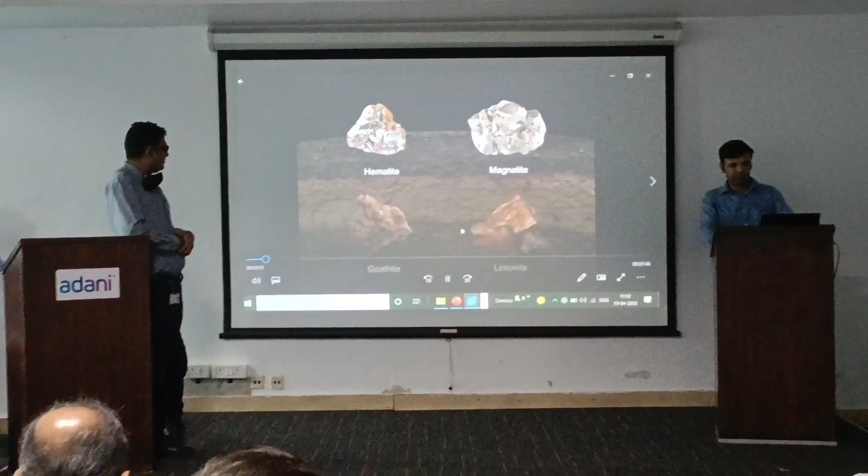That is the fact. But before we start, this is a very good platform wherein we can share knowledge. What actually is a steel industry all about? How do we make steel? So for steel we need to make iron. So with iron we can start. What we have is basically the ores, different types of iron ores, which go into making the iron in the smelting process.

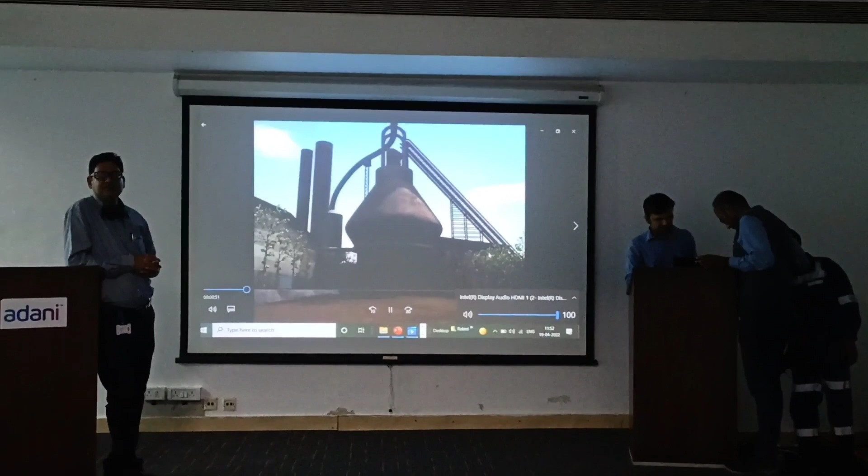Blast furnace is actually the heart of any steel industry or an iron making industry, basically because blast furnace is the furnace in which the smelting process takes place. This is a typical visual of a blast furnace, which will be a sort of belly shaped vessel. Almost the diameter 10 to 25 meters, the height being 30 to 45 meters. The hearth is the place, जो जैसे hearth मतलब गर्म, where the actual smelting or the process of reduction of the ore into iron takes place.

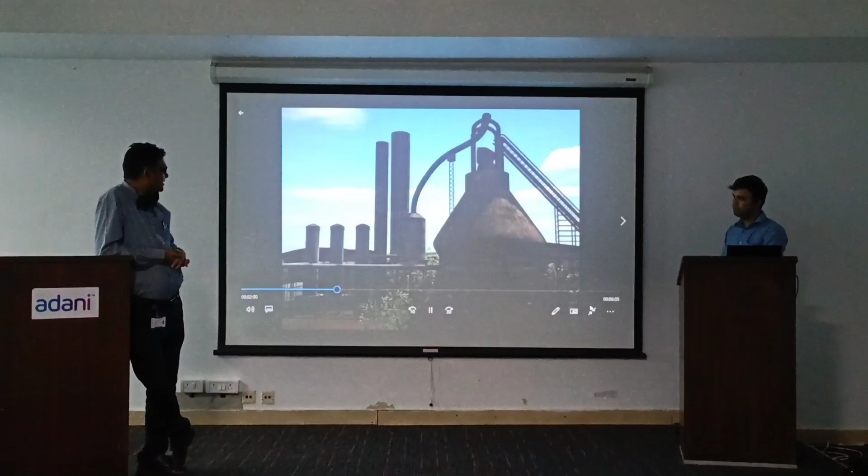From top the charge is put in, wherein the charge will be a mixture of coke, iron ore, limestone, dolomite. Molten metal and slag come from the bottom. Basically, जो hearth है जहाँ पर process होता है. The dust catcher is, of course, where the off gases come in and the dust is collected. The stoves give the hot air blast through the tuyeres.

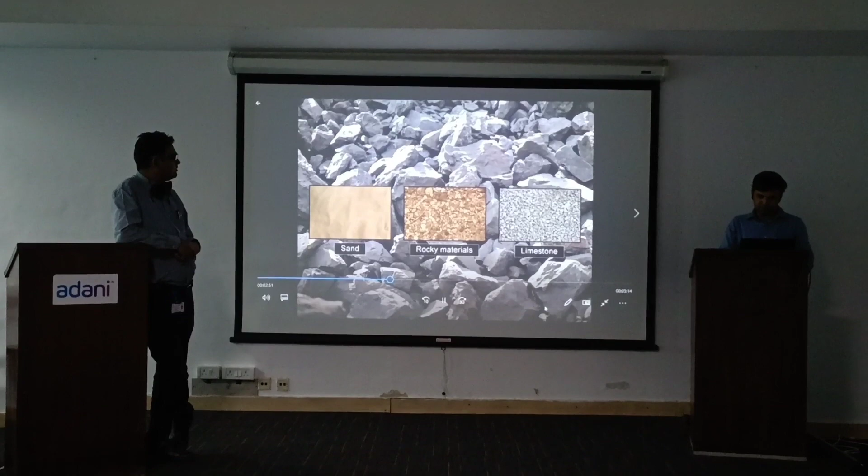This is actually जो impurities होते हैं, where you add limestone dolomite for the agglomeration of all the impurities. जैसे दूध में आप ऊपर जो ये देखते हैं मलाई जमती है, इसी तरह slag जो है, it gets collected with all the impurities, and the molten metal then comes in its pure form.

So the hot air blast helps in heating the mixture as well as calcination, which ultimately helps in the smelting process of the iron. Coke is added, which functions as a fuel, as well as the carbon of the coke helps in the reduction reaction through formation of CO. That CO will help in the reduction of the iron oxide.

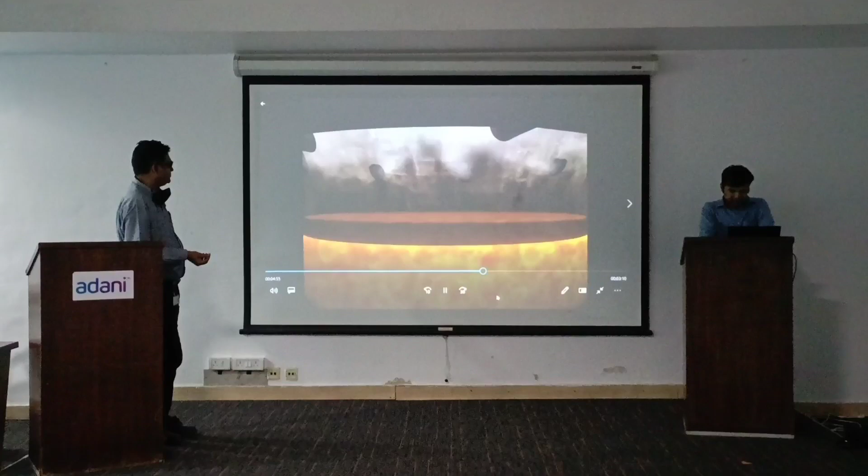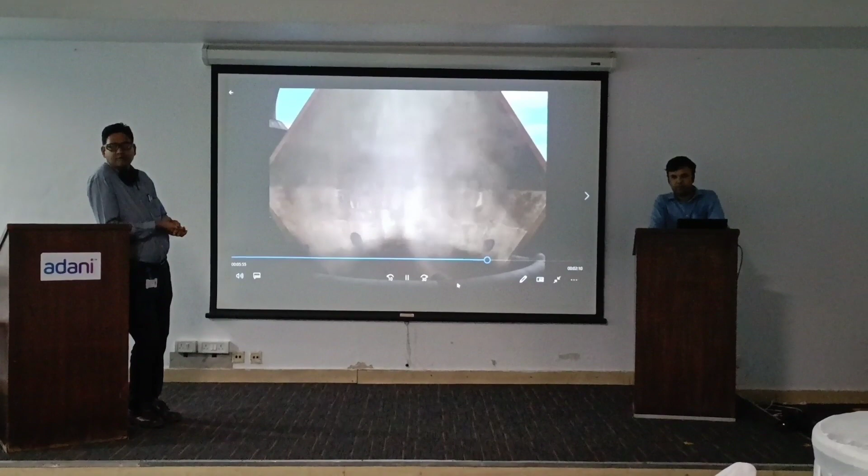This is where the combustion takes place in the hearth of the blast furnace. And the temperature ranges, as I said, 300 to 2000. The CO2 combining with the carbon from the coke forms carbon monoxide. And this is what the slag is all about, where the calcium oxide from the limestone gets combined with the silica part or the impurities of the ore, forming slag.

Now the reduction reaction will take place, where the Fe2O3 combines with carbon monoxide to form liquid molten metal, that is liquid iron, which is also called pig iron. And this molten metal, being heavier, will collect in the hearth at the bottom of the furnace, which is again tapped. This is how the tapping and the liquid metal comes in. There will be a separator which will separate the slag, which is not desirable to us, and the liquid metal.

The liquid metal is taken for further processing into finished products like, as I said, the ductile iron pipe, or it can be used in steel making plants to make different grades of steel and further processed into casters or pipes, plates, and coils.

Unfortunately, we did not have the audio. We had further videos also.

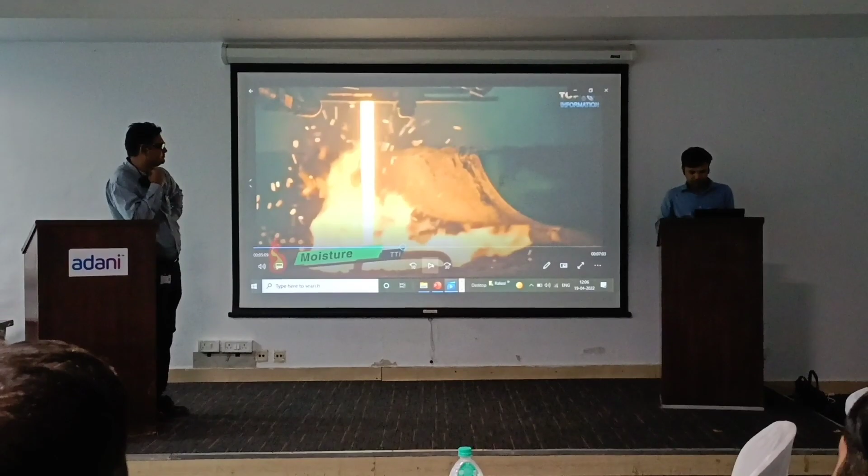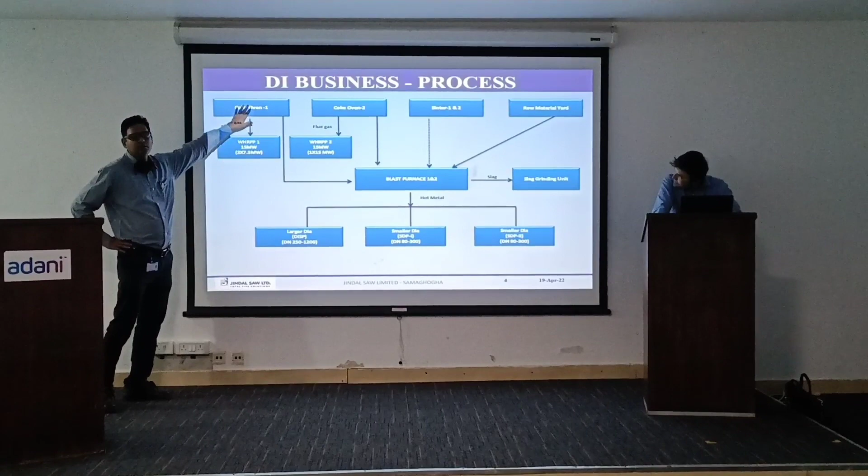So basically, if we talk about the business in a flow perspective, this is how actually these DI pipes are made. This is the finished product, large diameter. Start from coke oven, where I said coking. Coking is a process of making coke from coal. There are specific qualities of coal which are called coking coal. From there, this coke is used for blast furnace.

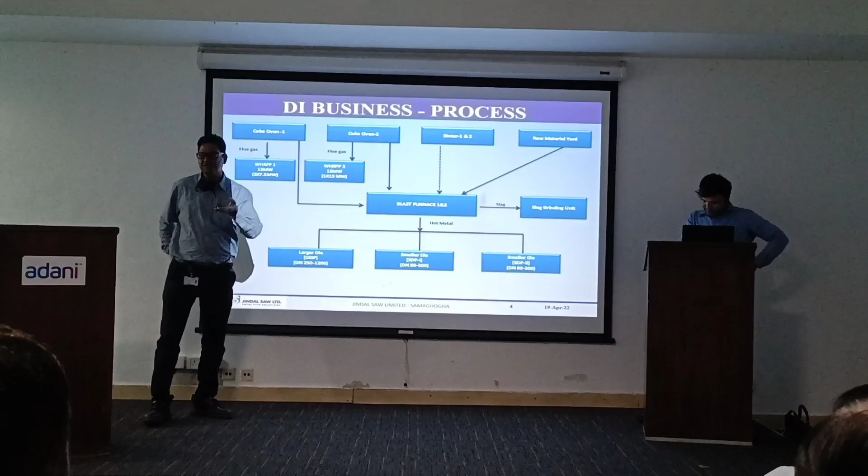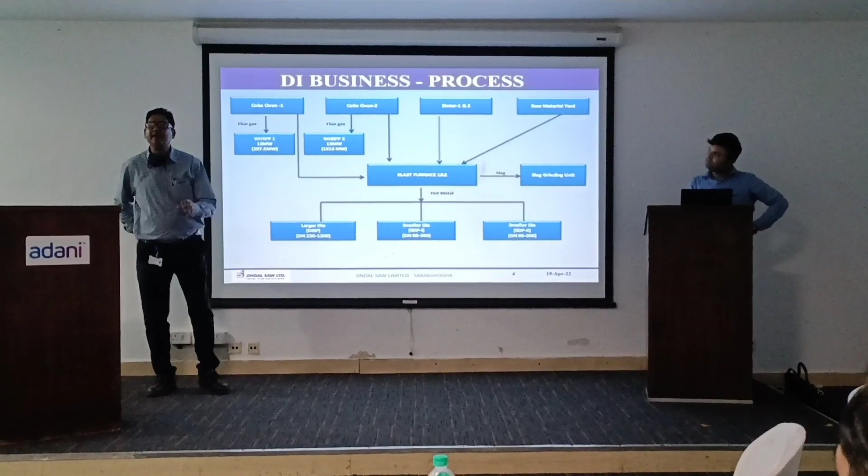कोक ओवन से जो हमारा वेस्ट गैस आ रहा है, जो हीटेड ऑफ गैसेस है, उसका हमारे पास वेस्ट हीट रिकवरी पावर प्लांट है, जिसको हम अपने ही प्रोसेस की रिक्वायरमेंट के लिए, एनर्जी के लिए काम में लाते हैं। सिंटर भी एक इंपॉर्टेंट चीज़ है, जो फाइन्स हैं, आयरन और कोक के फाइन्स, ये बहुत महीन होते हैं।

या तो आप उनको वेस्ट में कहीं कर सकते हैं, मेजर चंक हो जाता है, इसको हम प्रोसेस में भी नहीं डाल सकते, फाइन्स का डालना प्रोसेस को भी डिस्टर्ब करता है।

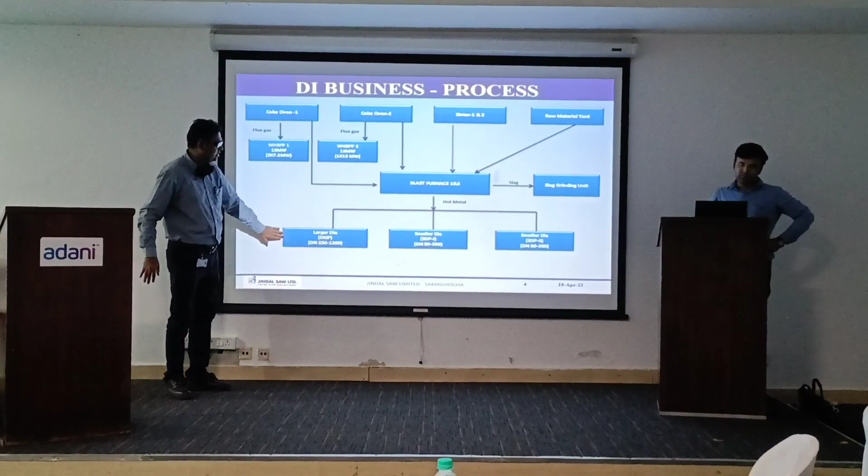आगे बात करें तो ये सब मिला के ब्लास्ट फर्नेस से आयरन बनता है। आयरन जो है, DISP जो यहाँ पे है, मतलब लार्ज डाया और स्मॉल डाया पाइप्स में जाता है। जो स्लैग हमारा होता है उसको भी हम सीमेंट इंडस्ट्री में यूज कर सकते हैं, या हमारे पास भी छोटा स्लैग ग्राइंडिंग यूनिट है, जिसका सीमेंट अभी तक हमने स्पेसिफिक बिजनेस का पार्ट नहीं बनाया।

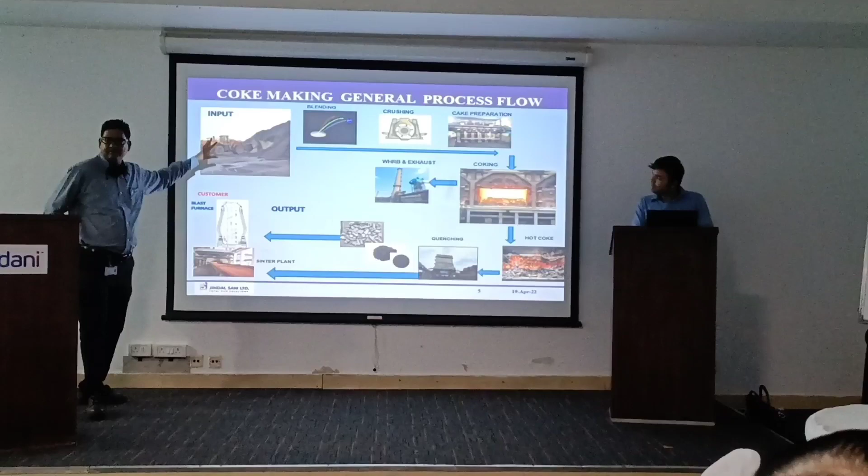नेक्स्ट, ये एक्चुअली कोक मेकिंग है, जो मैंने शुरुआत में कहा था, कोक मेकिंग का जनरल प्रोसेस फ्लो। जो कोयला आता है जैसे थर्मल ग्रेड, वो डिफरेंट है, हमारे यहाँ पे उसका जो पायरोफोरिक सीक्वेंस और वोलेटाइल मैटर कम होता है, इसलिए हम लकी हैं कि हमारे कोल यार्ड्स में धुआं और आग नहीं लगता ऐसे मौसम में। इसी कॉन्टेक्स्ट में इस ग्रेड को कोक ग्रेड कोल कहते हैं, वो हम यूज करते हैं।

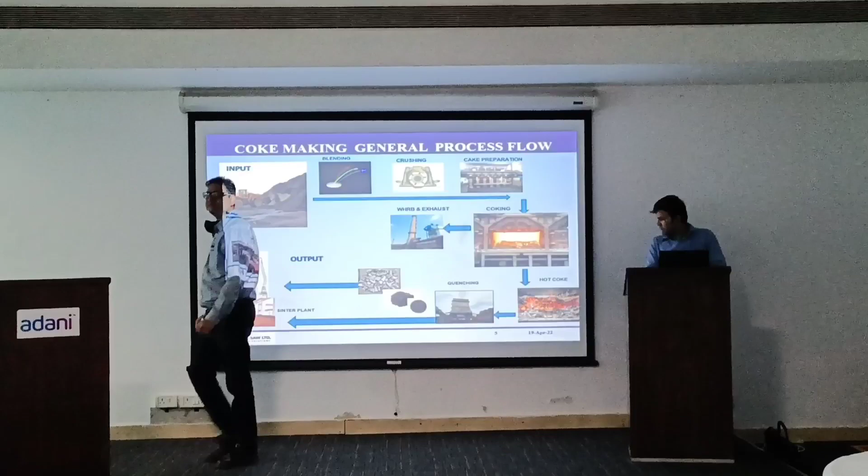इसको ब्लेंडिंग करके, स्पेसिफिक क्रशिंग करके, पार्टिकल साइज प्रॉपर्ली करके उसकी केक बनती है स्टैंपिंग करके। जो कोयला है उसको पीट के उसका केक बनाते हैं, फिर उसको भट्टी में डालते हैं, कम से कम 48 घंटे पूरी तरह हीटअप होके वो कोक बन जाता है।

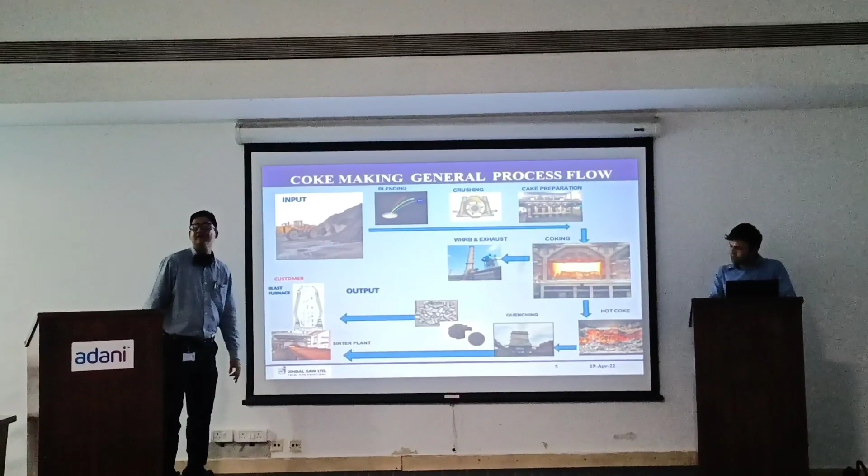अब इस कोक को हमने क्रश किया और भेज दिया ब्लास्ट फर्नेस में। जो फाइन्स होते हैं क्वेंचिंग के बाद, उनको हम सिंटर में यूज करते हैं। सिंटर फिर एक एग्लोमरेशन प्रोसेस है, जहां पे हीट करके छोटे-छोटे पार्टिकल्स को मिलाकर, और वो सिंटर फिर ब्लास्ट फर्नेस को दिया जाता है।

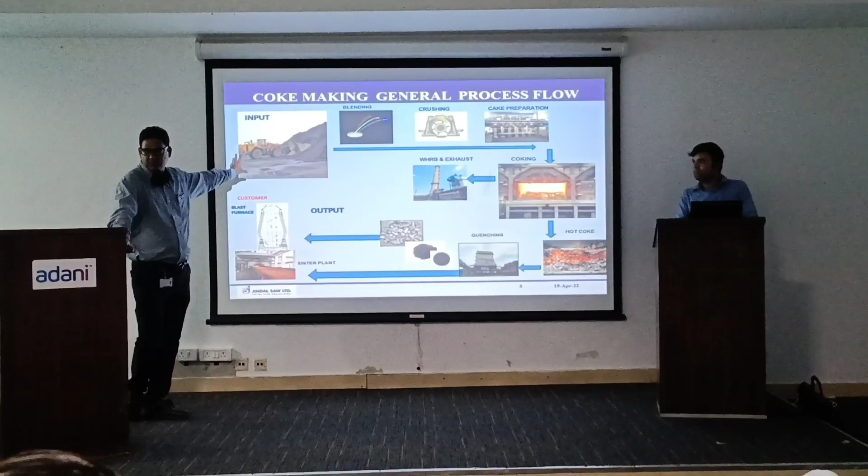Now this is the process. When I talk about the safety perspective, it starts from the yard, storage yard, as such that there will always be potential of fire when we have coal. It's a good thing that it is less volatile matter into it. But in terms of fire perspective, we've got fire hydrant system.

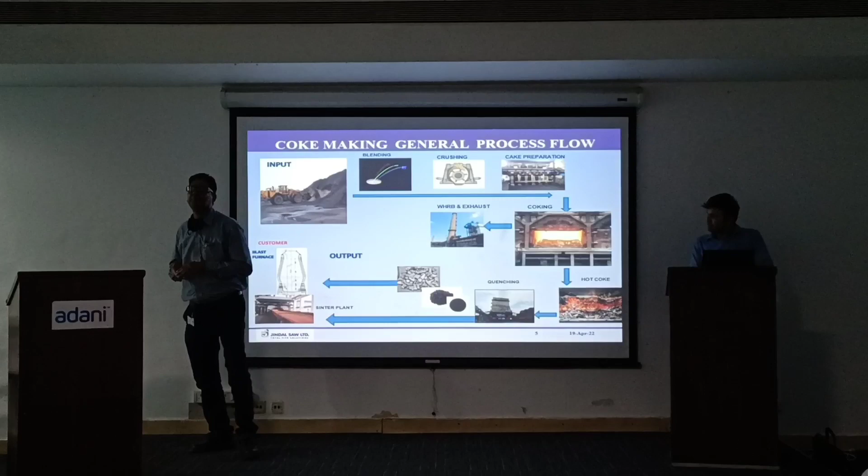In addition to that, if you talk about the coking process itself, वहाँ पे around 1200 डिग्री के आसपास टेम्परेचर पे we are actually having that भट्टी, so that is always a potential fire area. However, since there is already a fire, this is no man's land. It is all fed through cars.

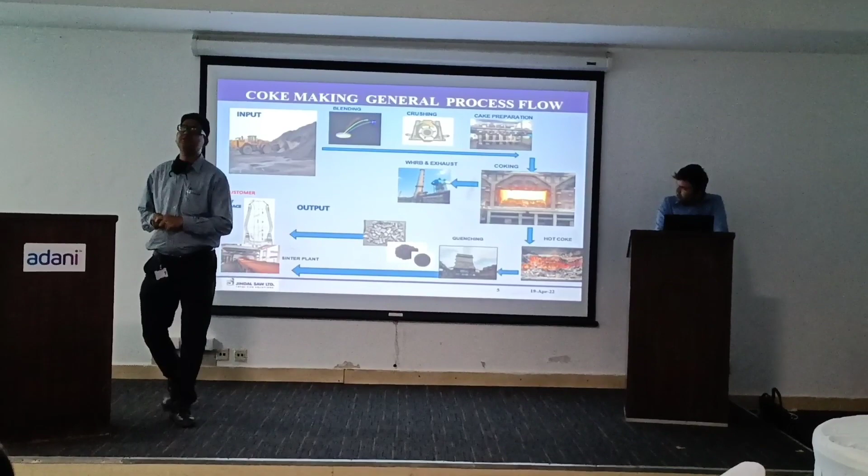Anytime during the removal of this hot coke or the quenching process, there will be potential fire possibilities. At present in Jindal we have only the fire ring mains, and in the quenching tower we've got a spray system wherein we must quench. So these are the fire safety perspectives.

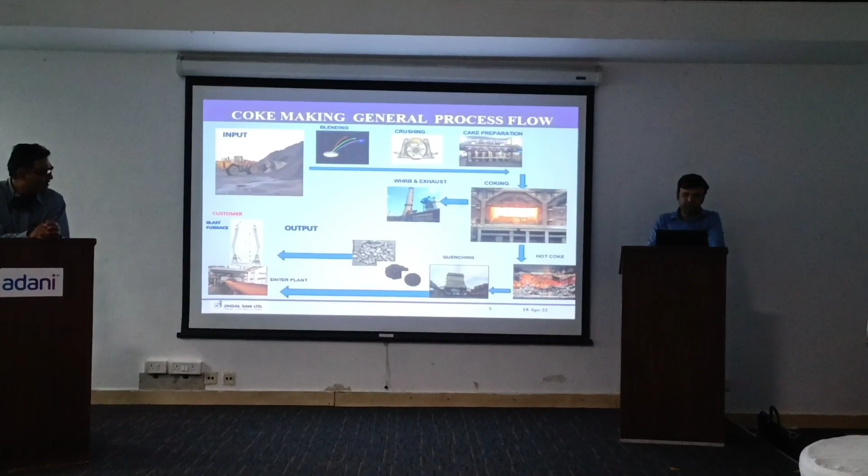In coke making process, of course, when we talk about the waste heat recovery boiler and the power generation perspective, there again we will be having the boilers and the steam which have a potential of fire and explosions. In terms of processes, we have got interlocks wherein the high pressure or the temperature trips the boiler as well as the turbine, protected by fire protection hydrant system and sprinkler system.

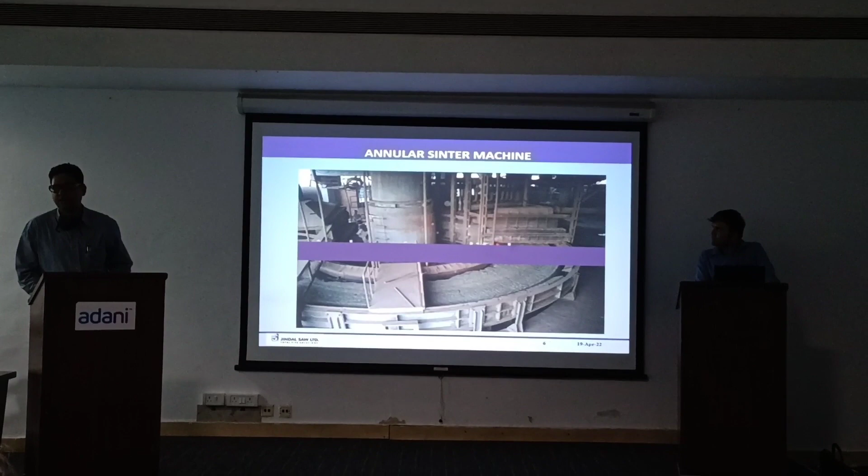Next, coming to the sinter, as I said, sinter is again a circular gear wherein it is fed, it is heated, and all the small fines which are collected, which can be a potential fire source, those are collected and reused in the blast furnace, so that it increases our plant efficiency as well as reducing the fire potential.

Next, this is actually now coming to the basic blast furnace consisting of various elements, जो हम आगे बात करेंगे।

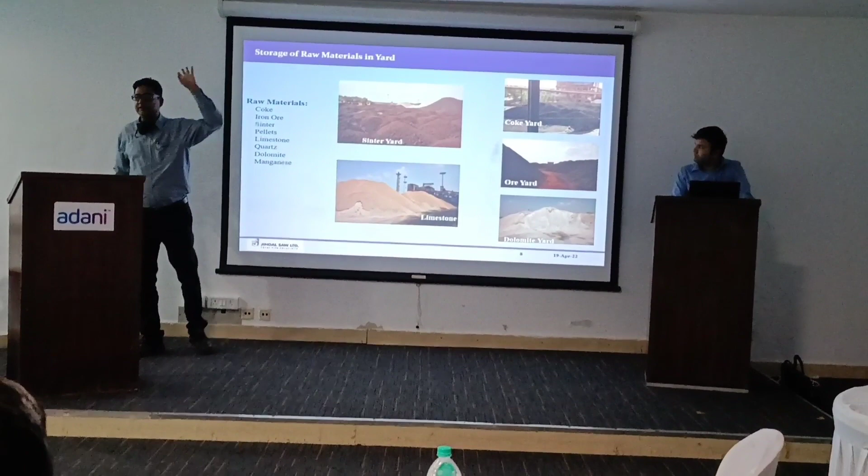Next, ये स्टोरेज की जो हमने बात की थी, कि यहाँ पे in the coke oven plant we have storage. We also have storage in the raw material handling system, which handles the coke which has been made in the coke oven, ores, sinters, limestone and dolomite.

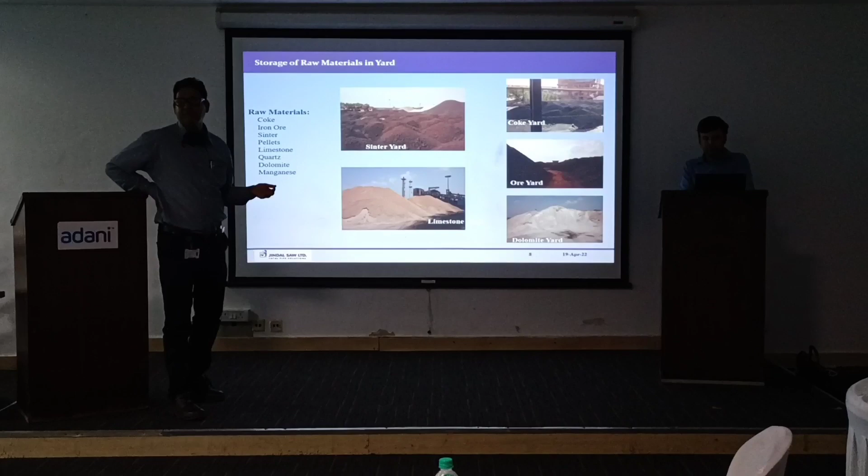All these areas carry the possibility of hot coke catching fire, which is an important fire potential. We follow the FIFO system so material does not stay for long, maintain proper heap size with stacking not more than 5 meters, and separate heaps with cuts so that if there is a fire in one heap, it does not progress. We also have fogging and fire hydrant systems.

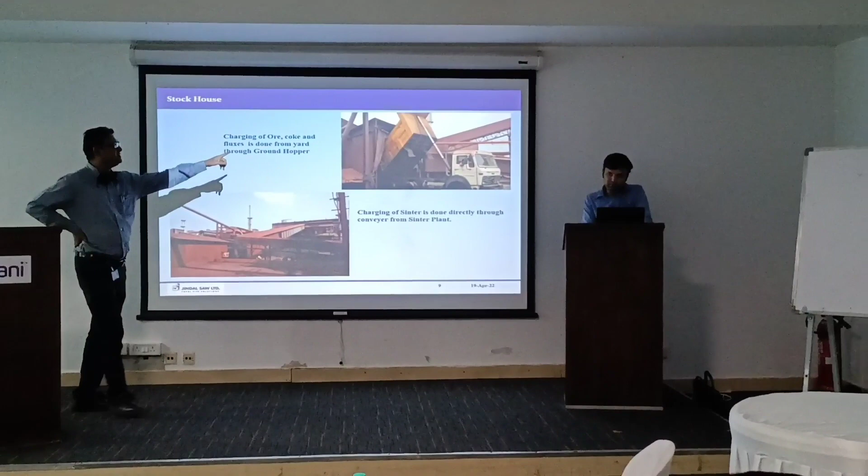There is always a fire safety potential here as well. We use lots of bulkers during charging in the hoppers, which can be a safety risk when screens need to be declogged, as there have been incidents before. So we have a physical guard as well as an alarm system for when a person goes there to poke the screens, to prevent any safety incident.

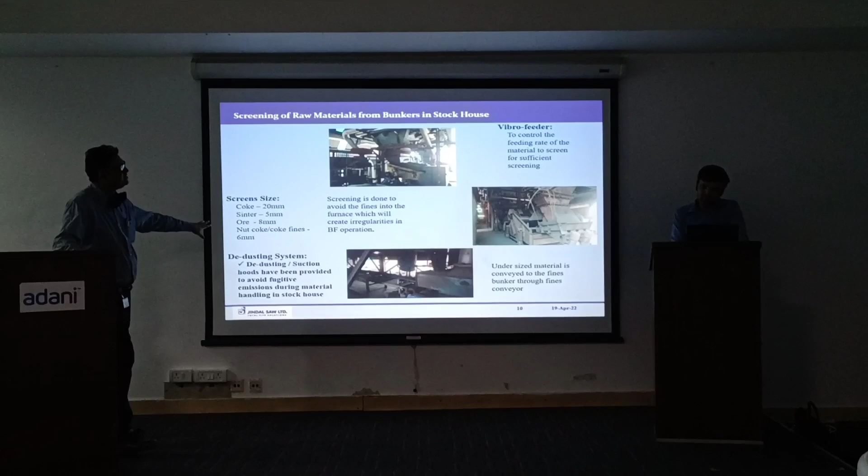Similarly, all this material is transported through a conveyor system. The conveyor system helps in conveying material, but there is always a potential for fire. So all of these are protected by an LHS cable system as well as sprinkler and hydrant systems.

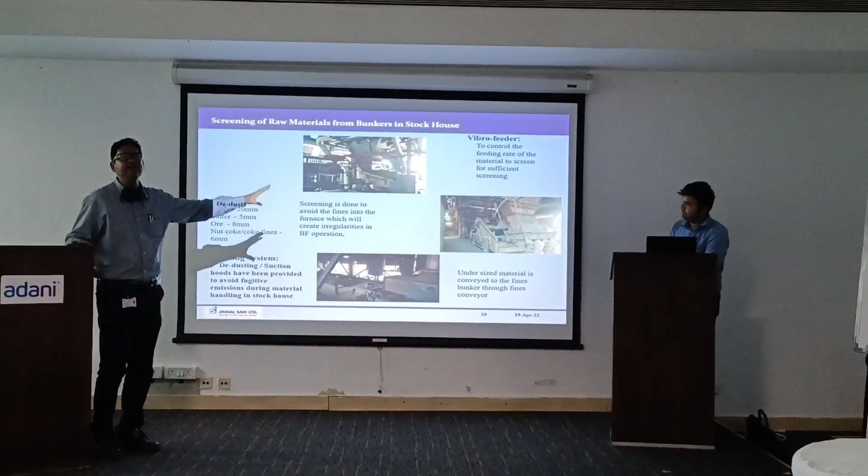One important aspect we always talk about in fire safety is process safety - how inherently we make the process safe. Basic screening ensures the right size goes into the blast furnace. This helps smooth operations because if finer particles go in, it can cause disturbance in the furnace, leading to undesired reactions and higher heat load.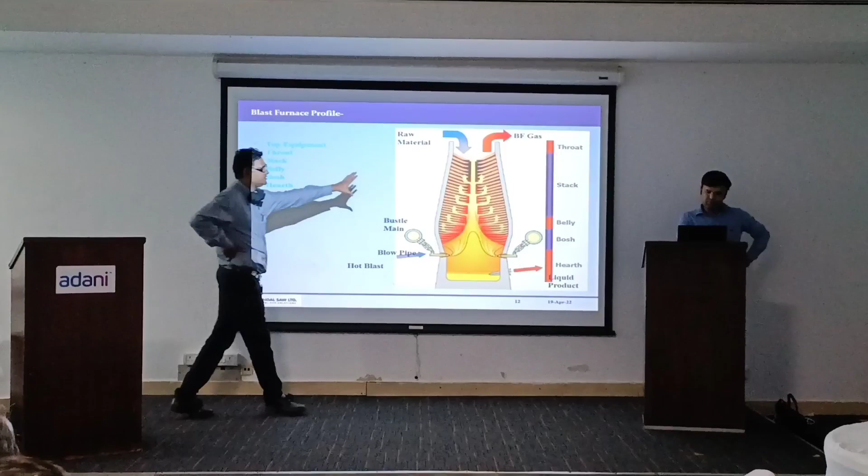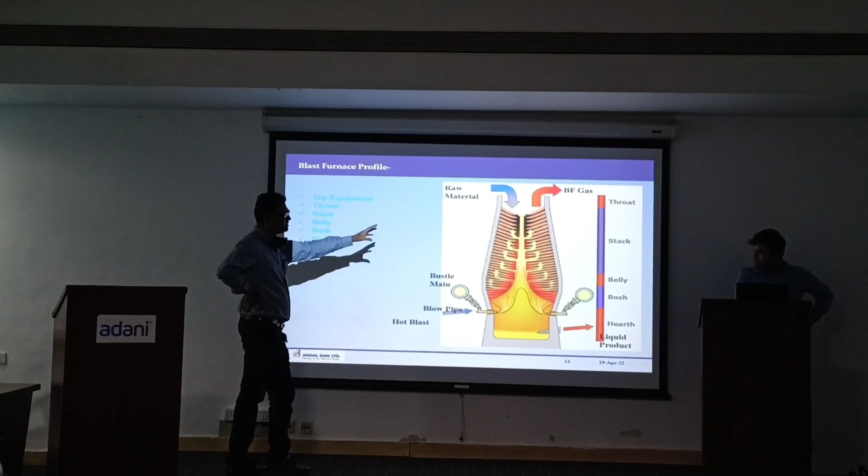Hot air is passed in. This raw material, because of the hot air and the presence of coke and fines, causes a reduction reaction where the liquid metal settles, and this liquid product is removed through the tap hole.

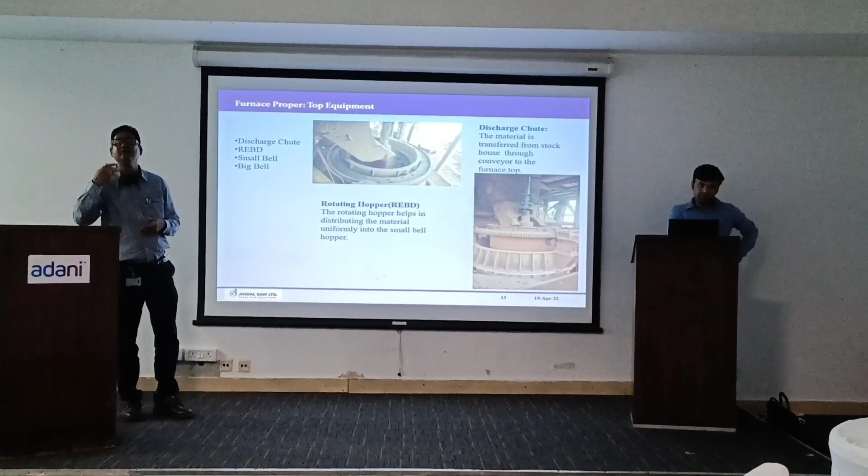From a process safety perspective, right distribution of the charge is also important, because if the charge is not getting distributed properly in the furnace, undesired reactions can lead to higher heat load. There have been incidents where furnaces have overpressurized and exploded.

This is an important fire safety perspective. The furnace itself is cooled so that high heat load inside doesn't affect the integrity of the vessel. This way, process safety is important for prevention of fire.

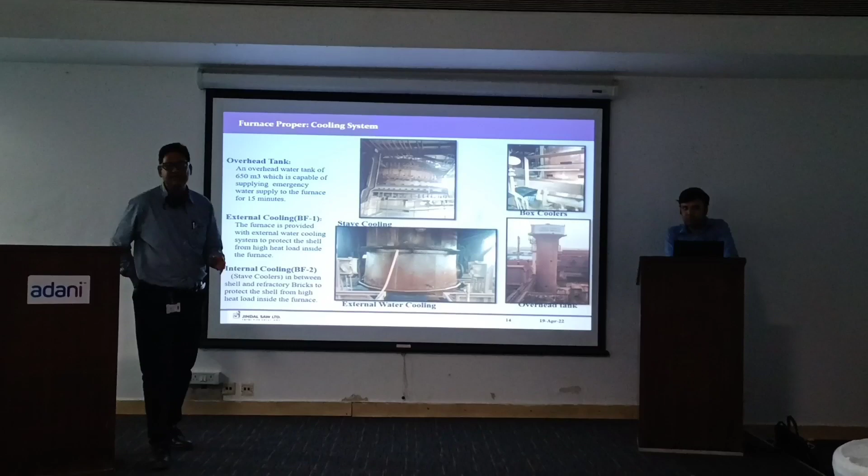There have been explosions. Let me share the incident of a cooling jacket bursting and a spill.

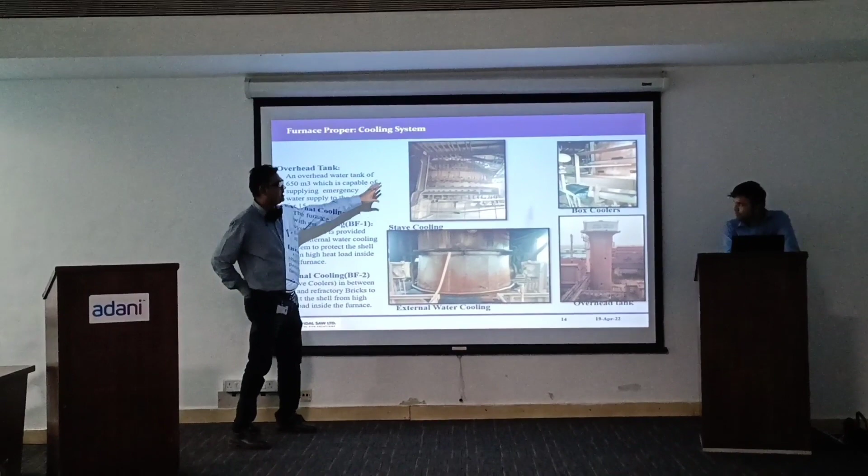There have been instances of the furnace blasting because the cooling water flow was stopped due to the pump getting tripped.

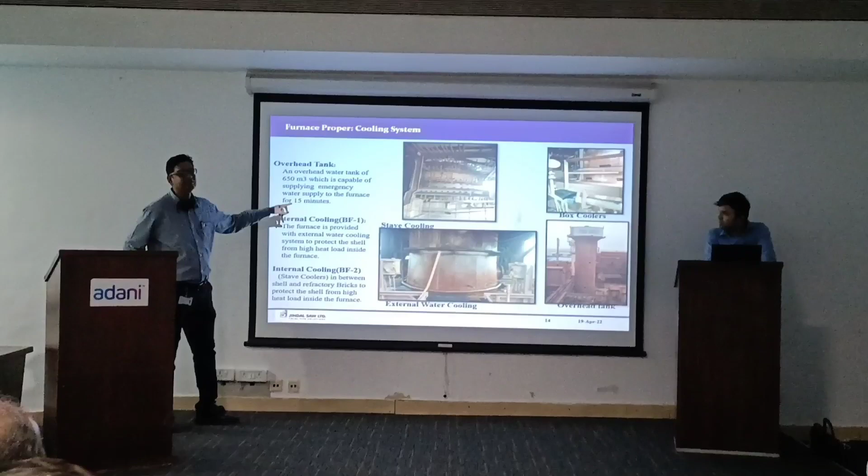So we have interlocks wherein this cooling gets stopped automatically. We've also got a gravity-fed system which can sustain cooling for 15 minutes, and in the meantime, emergency power backup allows the pumps to start. This is an important fire safety measure that the process team takes care of.

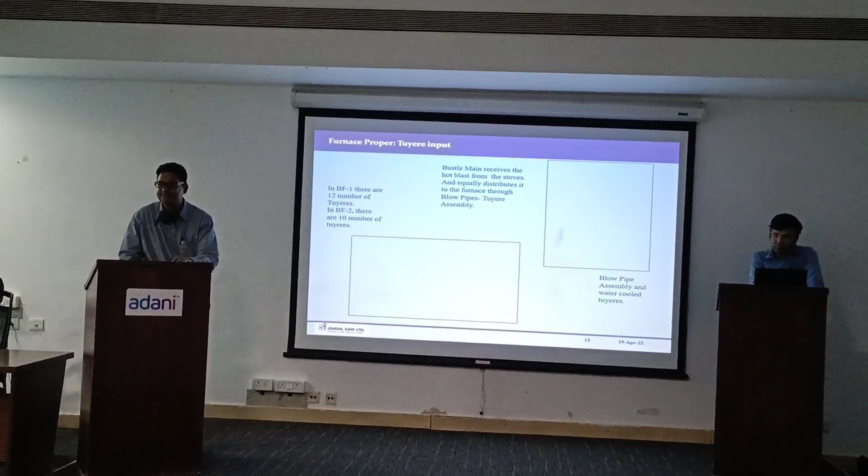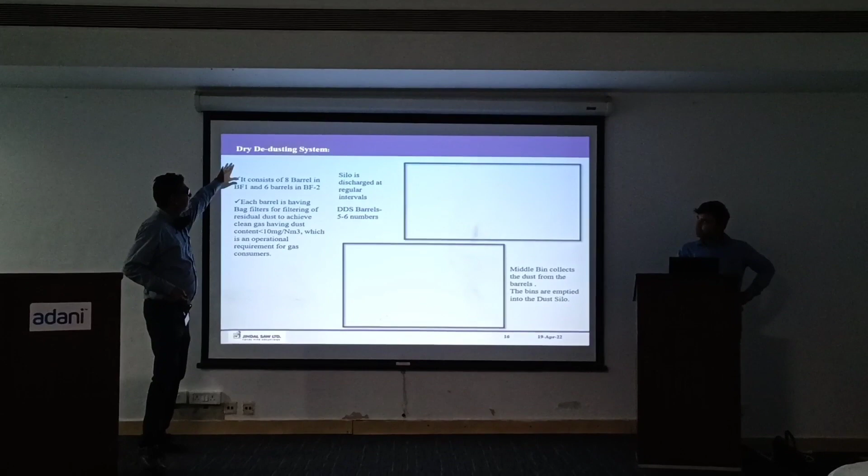What we also see is the dry de-dusting system, and the BF gas, which has calorific value, is used in different processes. All our furnaces, as well as the sinter plant, are operated using BF gas. We don't take other fuel as primary; as a backup, we've got LPG and other things.

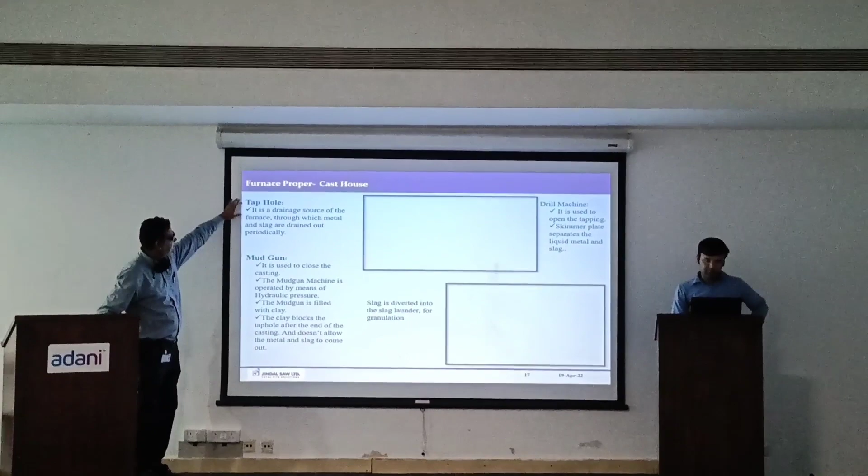It doesn't charge continuously; the charge takes about 45 minutes. After charging, you open the tap hole. This is important for fire safety - the tap hole and the mud you are using, if the quality is inferior, the tap hole will not stand pressure and it can open up, leading to fire. The quality of the mud or clay you use is important.

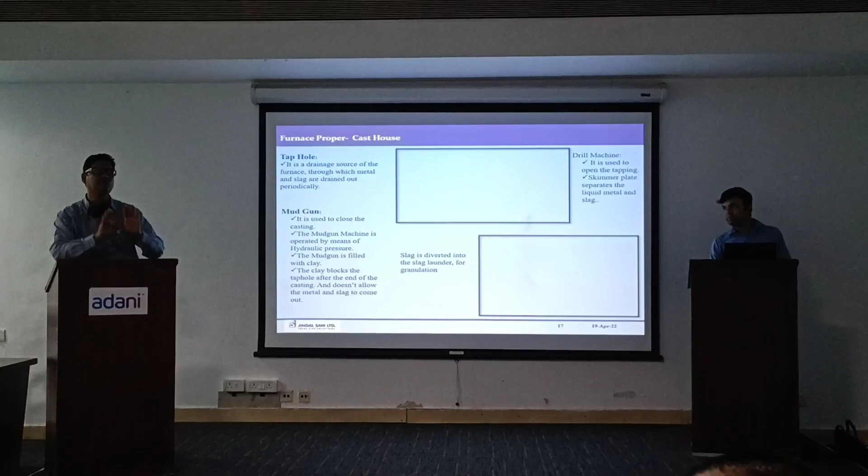Similarly, the mud gun will close the tap hole once a lot has come out. The mud gun is also a fire risk many times because it is operated by hydraulic oil, and if there are leakages, this can directly open the tap hole, causing fire in the mud gun. So in terms of leakages, you need to be very sure that there is no hydraulic oil leakage that can lead to this.

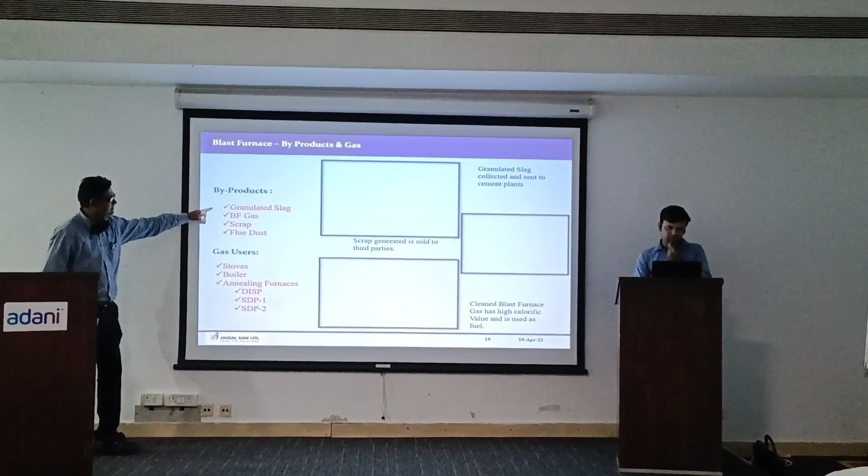This hot metal distribution goes into our plants where we make pipes. Next, the byproducts - the slag, as I said, goes into cement making also; we can make our own. BF gas is used for heating all this.

Next, this is actually our pipe process. Unfortunately some photos are not downloaded. This is the core making - now we finished iron making, and this liquid iron is going into making pipes.

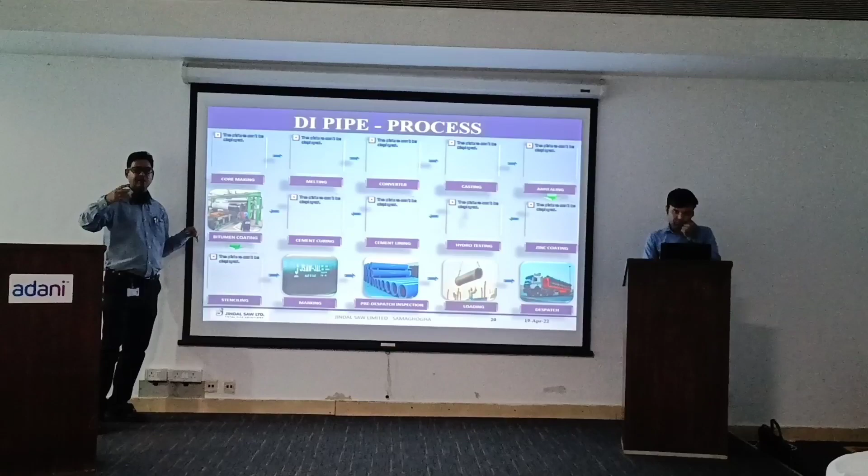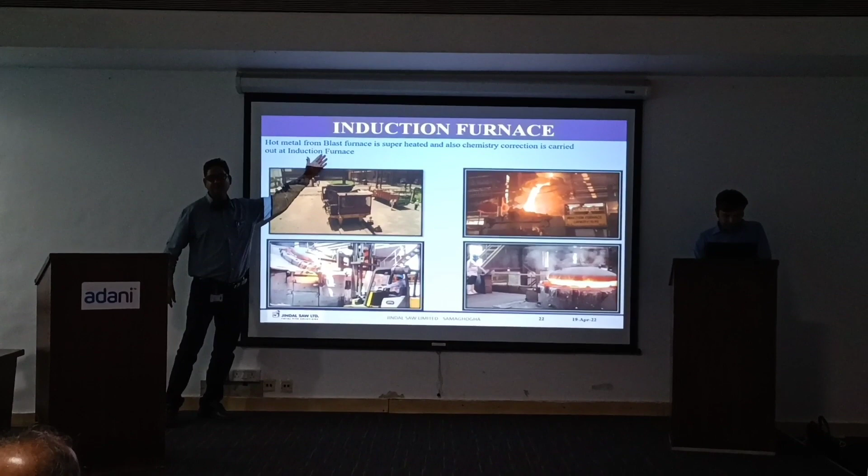We'll see the flow diagram again. This is the liquid metal which is transferred from the blast furnace to our induction furnaces. There is again potential for fire here because this ladle contains around 30 tons of metal, and if the refractory fails, it can lead to an incident. So there is process safety involved in the refractory.

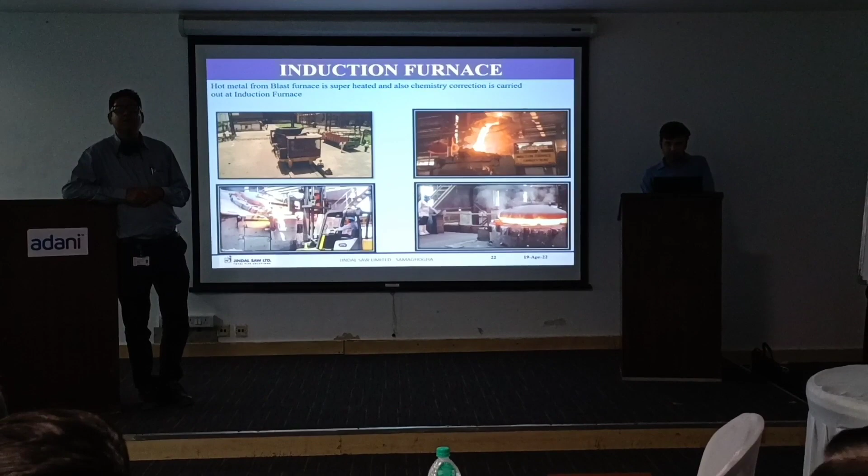The refractory lining gets changed after 15,000 heats. This is important because if we don't change it, the slag generated has to be removed, and during removal the lining can get damaged. The whole vessel, which is made of mild steel containing liquid iron, can melt. So this is an important fire safety aspect - the lining frequency must be checked and replaced timely.

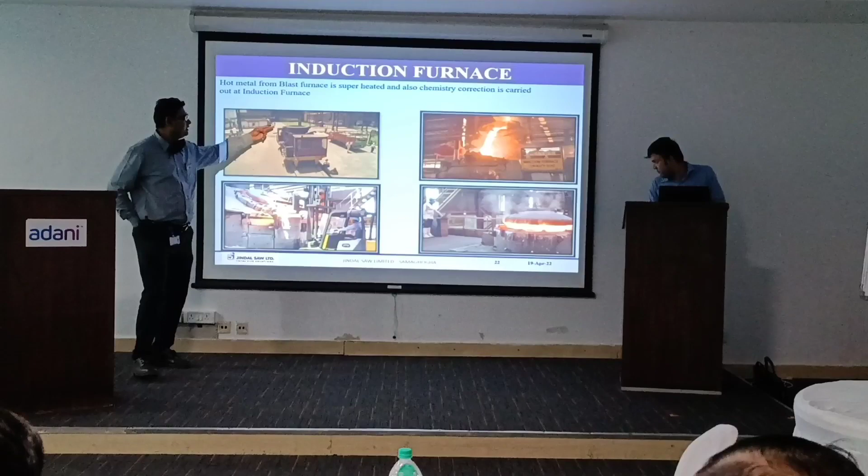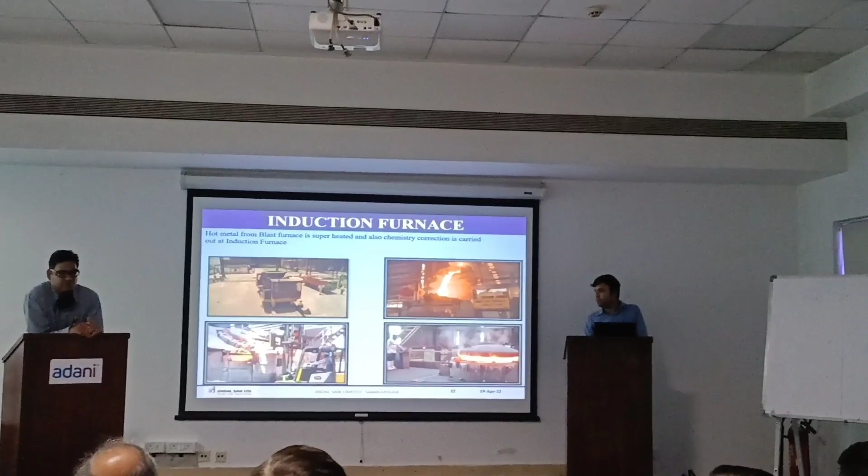Similarly, when pouring the liquid metal, crane safety is essential because it handles liquid at around 1500 degrees centigrade. We have an internal safety process for checking the integrity of cranes, from the hook block, which undergoes ultrasonic thickness testing every 6 months by a level 2 inspector to check for deficiencies in the hooks. The wire ropes, exposed to high temperature, are inspected by our team every 6 months for reduction in rope diameter, with any reduction less than 5% being acceptable.

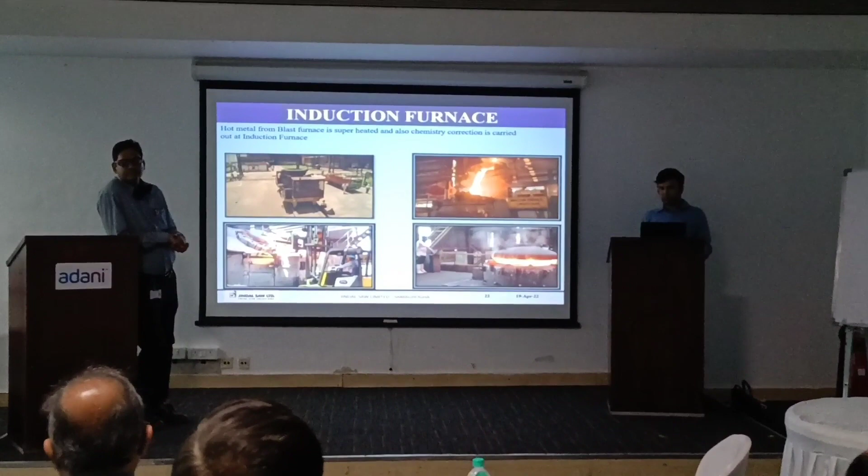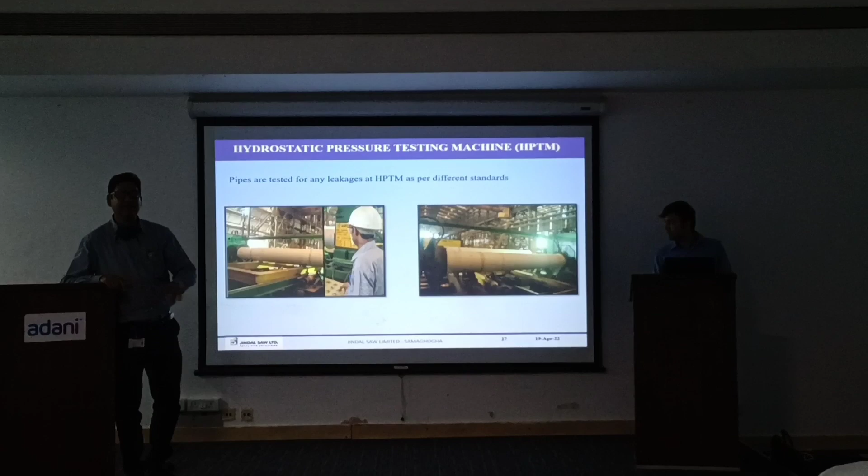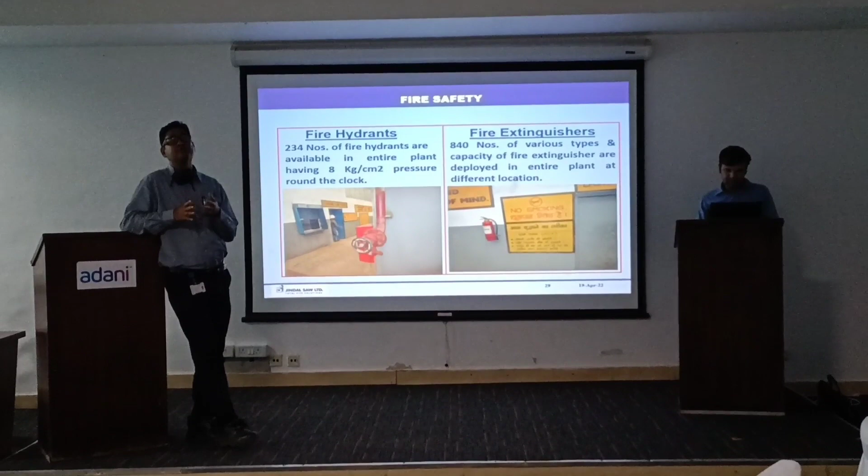I will not go into our own system because my idea here was not to talk about fire safety, whether it is firefighting or firefighting systems. My idea today was talking about the process safety in itself, how the processes are made inherently safe to prevent incidents.